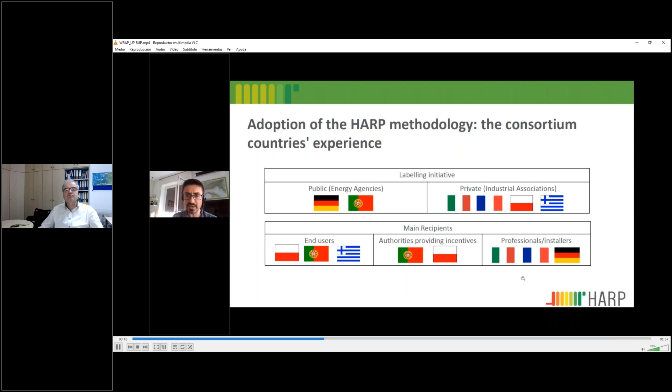BuildUp also offers the opportunity to host webinars on all the topics related to energy efficiency. More recently, BuildUp has opened the opportunity to distinguished experts in the field to share their knowledge in front of our cameras in the BuildUp Expert Talks.

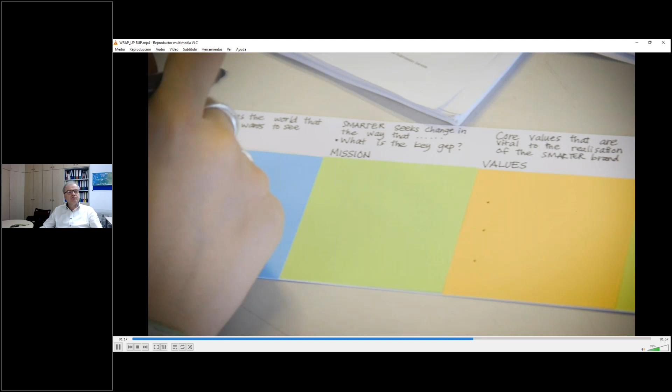BuildUp portal shares daily the most relevant events in the field of energy efficiency and renewable energy, but also participates actively in many European events around the year as EPB Center and REHVA Conference, Horizon 2020, Interreg, and Cost Actions events, Covenant of Mayors, and much more, with the aim of further disseminating the results and helping to create high-quality media content.

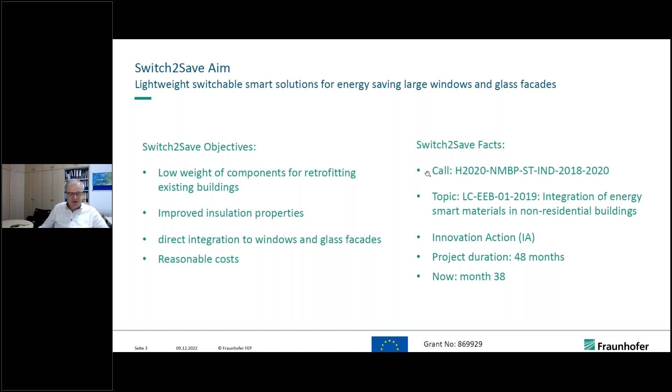At the end, we want to have components ready for retrofitting. So this is a short introduction about the consortium targeting exactly this. We are covering the entire value chain of such a research and development project, starting really from the basics, from the materials. Of course we don't start from zero here; all institutions have pre-existing know-how, and in the project it came about improving that, making it more reliable, more effective.

But that was really only the starting point of the project. The main core of the project was the development of components out of these materials, which are ready for building integration. And finally, where the project presently is, we want to go into buildings in order to demonstrate what we have achieved and measure the effect.

So this is a little bit more in detail on what exactly these steps meant. At the beginning we had to look into the materials which we had, about electrochromic and thermochromic materials, both special classes of switchable coatings which are already known in science for a lot of years. These materials should be improved and then put down onto components which are prone to be integrated into demonstrator buildings and components.

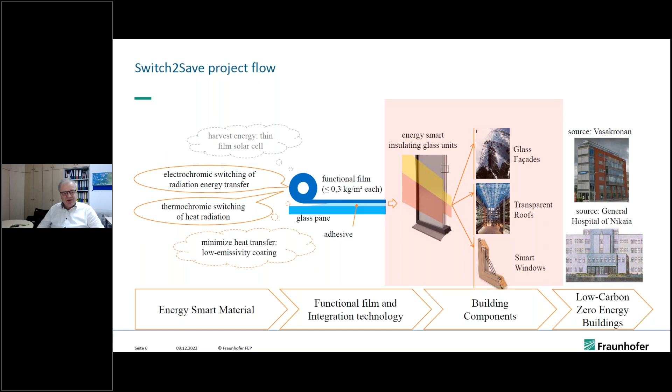Presently, we are closer to the end of the project, and we are indeed at the core part. The outcome of the project will not be to have just 2 or 3 buildings equipped with these smart or new materials, but really to have the components available to equip different new buildings and distribute this over Europe after the end of the project.

So I have already mentioned the two terms, electrochromic and thermochromic, which play a crucial role in our project. Now I want to shortly introduce you to the nature of these materials and what we can achieve with this.

If you look into window technology development, that has already a pretty long history. The first windows were installed by human beings around 4,000 years ago. But for a very long time, energy efficiency was not the main issue connected to the development of windows. So this changed

in the 1970s, in the course of the first oil crisis. Since then, saving energy in the building sector really became an issue. The first answer, well developed since then, was the development of low-E and solar control coatings in order to make windows more energy efficient than they had been before. This can today be regarded more or less as state of the art, even though technological developments in this area are still possible.

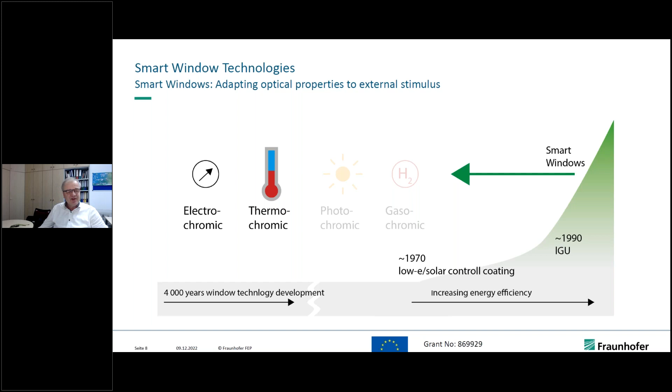So let's start with explaining what an electrochromic coating or electrochromic window can achieve. First of all, the stimulus which changes the optical properties is an electrical control signal, meaning that it's something an operator, an owner of a building, can control, or a human-installed control unit can give out this electrical signal. So that's something which can really be changed intentionally by the control software of the building.

This situation you have here on both sides, and what you can do with electrochromic coating is tune the properties of the windows, so you can control how much of each component is coming through the window. You see that you have a bright state and a dark state, and in the dark state you reduce the incoming visible light to a very low portion, but you also have a considerable effect on the near-infrared light. So what you achieve here is a shading for the light itself, but also a shading for the transmitted radiation. This is reduced to around only 1% of the original values coming from outside.

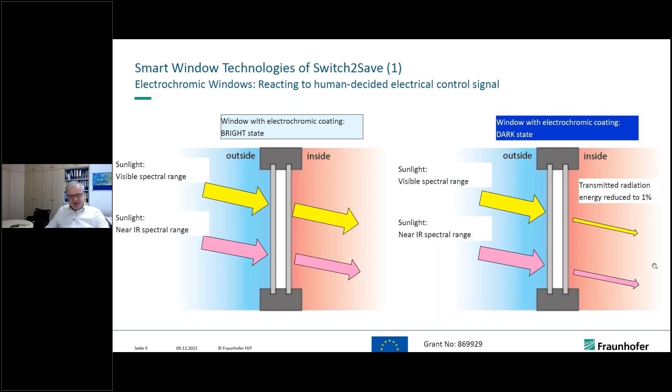One needs to say that here only the radiation transfer is considered. There's also a heat conduction component which is not considered in this presentation, but also plays a role if you want to make detailed considerations. But the picture is basically as I have shown here.

In case of the thermochromic windows, you don't have the possibility to control it yourself, but the window is controlled by the external stimulus of temperature, meaning that the window changes its properties by itself if the temperature of the window is changing.

Here you have the same situation. You have illumination from the outside consisting of the visible spectral range and the infrared spectral range. You have a bright and cold state in which you have a reduction of both components, and you have a warm state in which the visible light is more or less unchanged compared to the cold state,

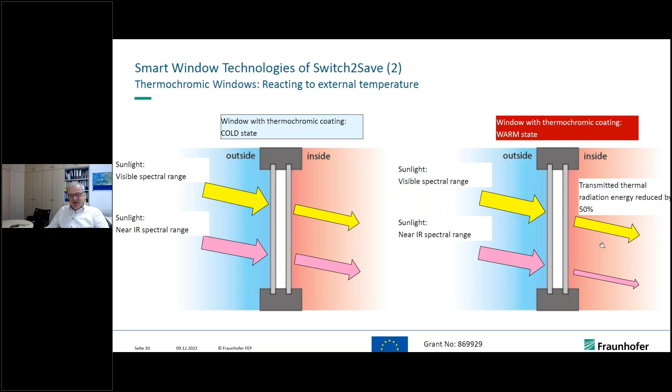but you have a reaction only in the near-infrared, meaning that the window is controlling the amount of heat in the near-infrared range by itself, but it's not changing the radiation in the visible spectral range. You don't see the change, but nevertheless the energy input itself is changed.

transmitting the heat, but it's not visible for human beings. As a state of the art, we can regard the static coatings, the low E and solar control coatings, which are already known since the 70s, as I had explained at the beginning.

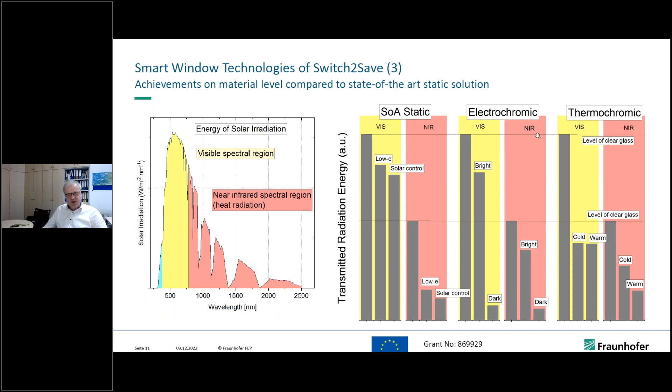And now, how do we demonstrate this in Switch2Save? We have different steps, and already at the very beginning of the project, in parallel to the material development, we started with the demonstration, and in this case, of course, it was based on modeling

different buildings and seeing how much can be theoretically achieved if we install the materials developed in parallel by the partners. We distinguished two situations from the geographical point of view. We made estimations in Athens, and we made the same estimations in Stockholm, which of course have completely different climatic situations and also different requirements concerning heating and cooling.

And I need to say that these model buildings, which had been assumed here, were buildings with a very high percentage of window installation, which can be typical for non-residential buildings, the topic of Switch2Save, but of course not all of them are like that.

And in particular, the demonstration sites, which we will introduce later, do not have such a high window percentage as the ones assumed here. So that's really an extreme case, and shows the maximum which can be achieved with these kinds of windows.

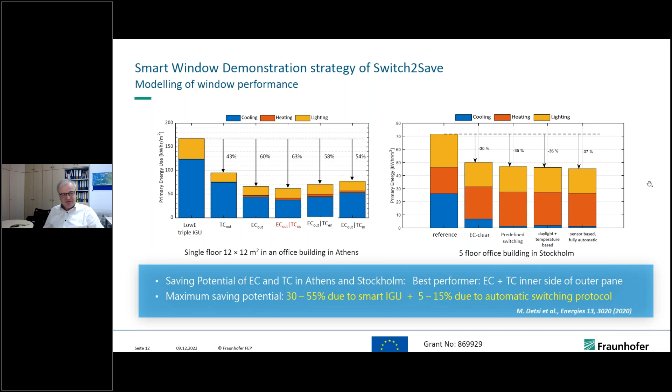The way how you can achieve this is really different in both cases, because in Athens you are saving for cooling, and in Stockholm, of course, for heating. Due to the special properties, especially of the electrochromic film, you also need to consider the savings achieved in inside illumination, because the electrochromic coatings are capable of adjusting the incoming light so that you need only a minimum. So this all together, and the high window percentage, leads to these maximum values according to the modelling of the building. So, of course, this is theory.

We are now going to practice. And in practice, it's of course the question of how you measure that you have achieved something.

There was a work package in our project which made a very interesting approach. It not only measured the temperature inside, but the main property was the so-called predicted mean vote, which measures the well-being of humans inside such a room. This is influenced by various factors. A very important one is the so-called thermal comfort, which is not only the temperature, but also air velocity, the floor temperature and the wall temperature, also the humidity, and still some other parameters. Then the indoor air quality is also measured.

And of course, the energy consumption measurement is a crucial quantity which finally will decide whether we had been successful or not. These measurements are made in rooms not only with a single sensor, but you have a real distribution of different sensors in order to have a very comprehensive view on all these properties, in order to have a reasonable outcome at the end of the project.

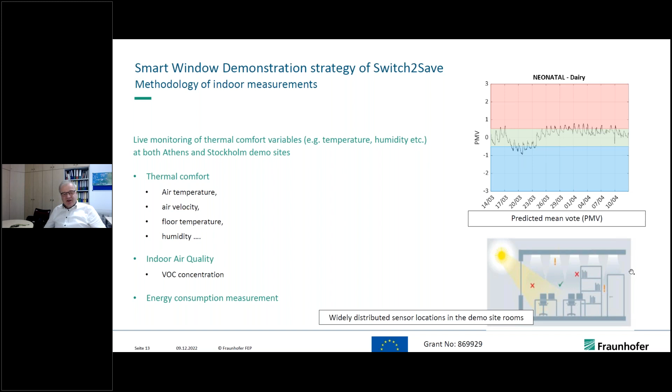So the approach, how to come to the results - there had been two different approaches inside the project. The most important one, for the big demo sites, is to divide the demonstration part into 3 phases. In the middle is the installation of the Switch2Save components. As I have already said, that's where we are presently.

Before that, the work package already started with the pre-monitoring of the interior of the demo sites, meaning that over more than a year, installations of different sensors had been made to really monitor all the parameters in an initial state. Now we have the installations, and right after them, post-monitoring of the interior of the demo sites will start, and then the post and the pre time will be compared, and the effect will be measured.

So as you might see, this is a quite challenging schedule. Challenging, due to the fact that, due to external circumstances which you probably all can imagine, the installation is later than we had initially anticipated, and we mitigated this with 2 approaches. One is that the post-monitoring will stretch beyond the end of the project.

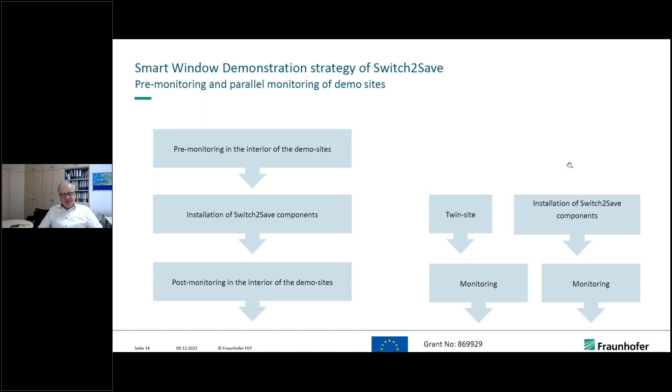So if possible, where possible, we take this approach also, so we have 2 approaches in parallel. With this, we hope that until the end of the project, which will be in September, we will have already reasonable pre-results, and then the completed results we will get only after a certain time after the end of the project.

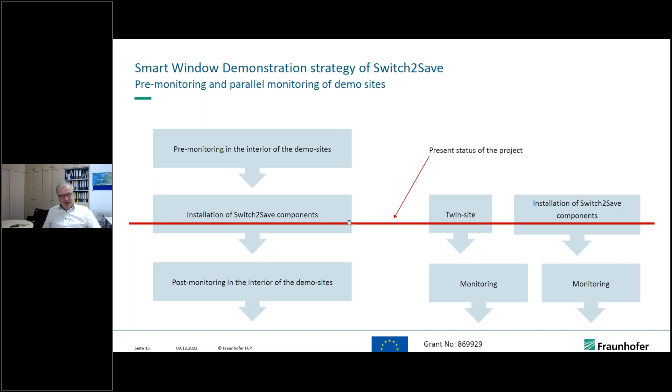So, yeah, here it's where we are. Installation of the components is taking place, and here is where it's taking place. We have two big demo sites, one in Sweden, one in Greece - two completely different areas in Europe. Both of them are non-residential buildings. The Kronan building is an office building, and in Athens we have a hospital.

Additionally to this, we have still installed in Dresden small mock-ups for measuring the effect of thermochromic roof elements. Here we will exploit the parallel approach, otherwise it would be impossible to get the result by the end of the project.

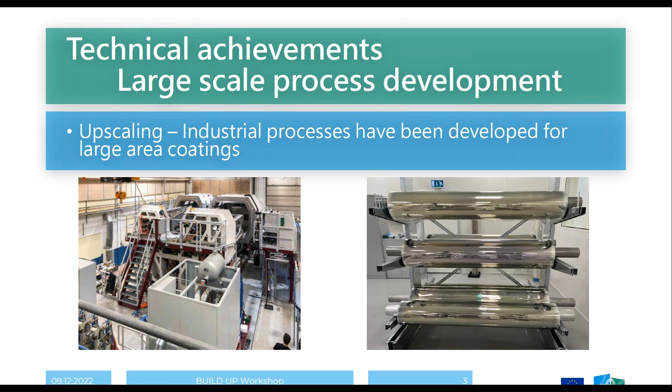I'll continue to the next technical achievement that has been vital in this project. Matthias gave you a lot of information about electrochromics and the importance of having a high light transmittance in the clear state. One of the objectives in this project was to reach a visual light transmittance above 70%, and that we have managed to do. Actually, we are now at 75%, which gives a very good light transmittance and a good indoor light situation in the building. It is, of course, very important.

Also, as I mentioned, we have scaled up the coatings so we can build very large insulated glass units. Another objective in this project has been to improve the insulation, and there we have achieved a very low U value for these IGUs, 0.4, which gives a very good value. We have also reduced the weight compared to a state-of-the-art insulated glass unit by 30%, and that is for a triple glass IGU.

As you can see on the picture here, this is an insulated glass unit. The width is 1.5 meters and the length is about 4.2 meters. This is very close to the largest we can produce now, because there is a limitation in the autoclave, in the glass lamination. So we cannot really fit glass that is longer than maybe 4.3 meters or so.

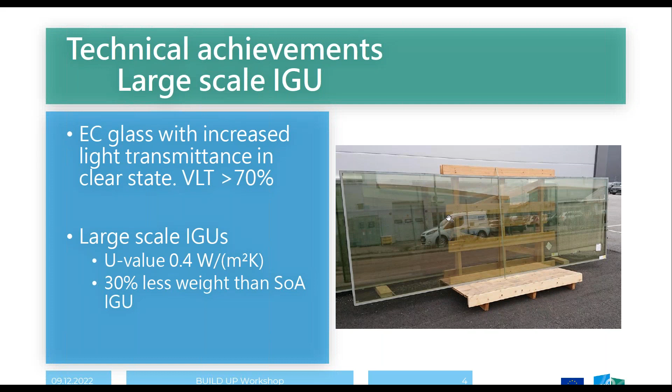Another very important achievement and deliverable in this project was to develop a wireless control system. The demo buildings are already existing buildings, and we don't want to interfere too much with the building. So when you install the control system, we want to get rid of as many wires as possible, wires for power supply and also for communication.

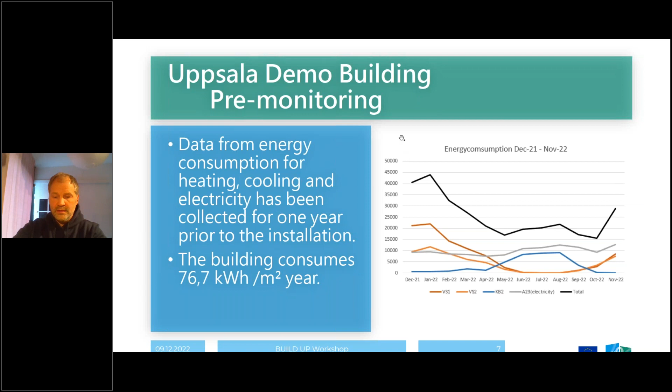So when it comes to the interesting things here, I would say the gases we don't expect to see much change in, but the indoor temperature, the illuminance, and perhaps also presence can change after the installation, especially if you have spaces close to windows where you have a lot of sun. People tend to avoid those areas during the summer months. It will be very interesting to see if there is a difference now.

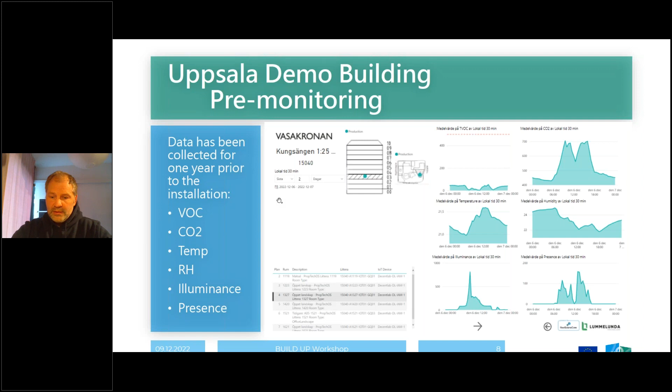We'll continue again. Okay, here. This data has been collected by Vasakronan, the largest real estate owner in Sweden, and they have very good software for both collecting and presenting data. So it's very easy to compare data from, let's say, different sensors that may be located in different rooms and floors, and also from different time periods.

So what we're looking at here is temperature variations over 48 hours. And down here we have the illuminance levels, also during 48 hours. This can be presented in many different ways. So that's really good.

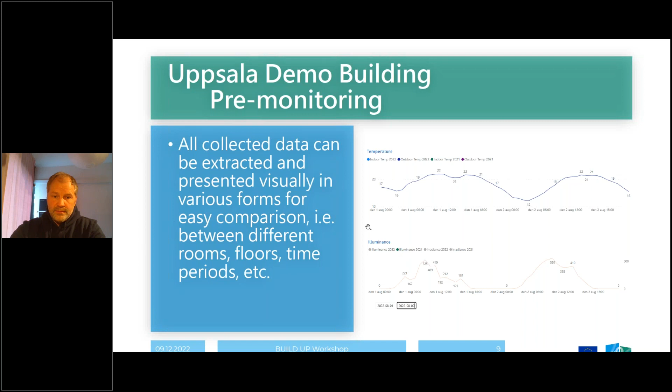Let's see, if I go to the next slide. Now I'm going to talk a little bit about the actual installation that has been done by Facade Glass. Before the lamination and installation, they had to modify the profiles. As you can see, the existing insulated glass units were just 2-pane IGUs, and now it's a triple-pane IGU, so they had to increase this distance a little bit. But apart from that, everything went smoothly.

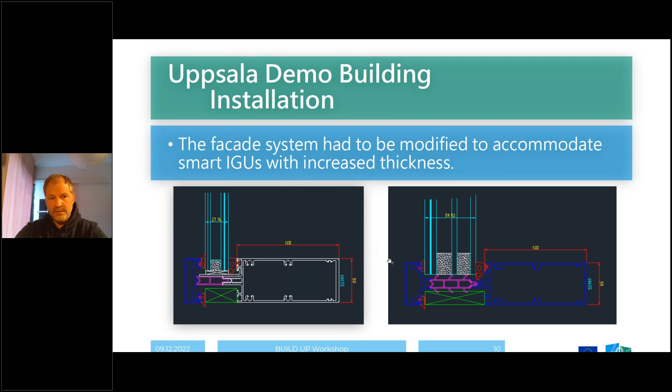I'm going to show you some pictures of the actual installation, if I can only change the slide. So today, actually last week, we installed all the glass panes, the insulated glass units. This is a 6-story building. As you can see here, the glass is delivered on racks like this and lifted into place by a crane, and the people doing it from the outside move it with this forklift here.

And as you can see, we have replaced 3 floors when this picture was taken. So the more bluish tone is the original windows.

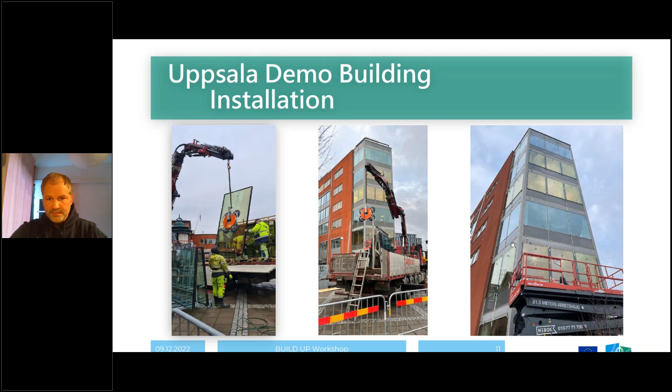And what's going on now, right now, is that we are doing the installation this week of the control system. It will be very easy to do now that it's wireless, and the follow-up monitoring or post-installation monitoring is about to be started, and it will be done in the same way as it was before in the pre-monitoring. We will have an extra focus on the energy consumption, the indoor temperatures, of course, also luminance and presence.

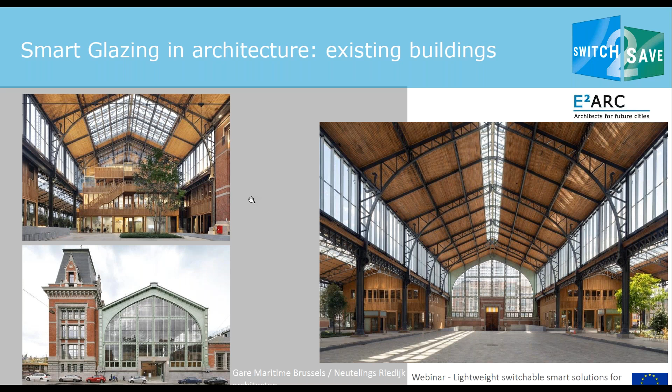With its many forms, types, and applications, glass can enhance the architectural value of a building. Large glass facades and roofs are now a major design element. Compared to opaque materials, glass is associated with increased heat gains and losses. Therefore, glazing selection plays a key role in determining a building's overall thermal performance. When using glass as such a dominant facade feature, the choice of the glass is key. In modern buildings, up to more than 60% of energy transfer through the building envelope is related to glazing components.

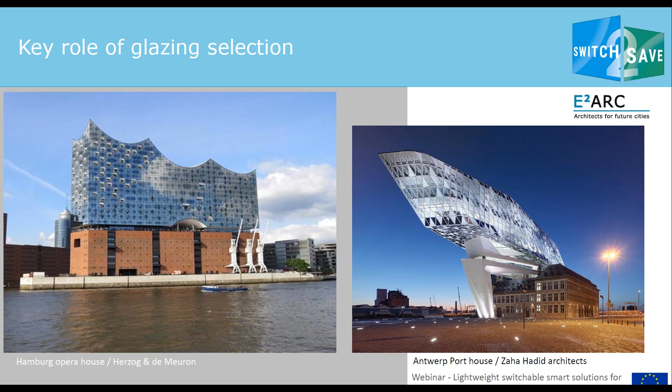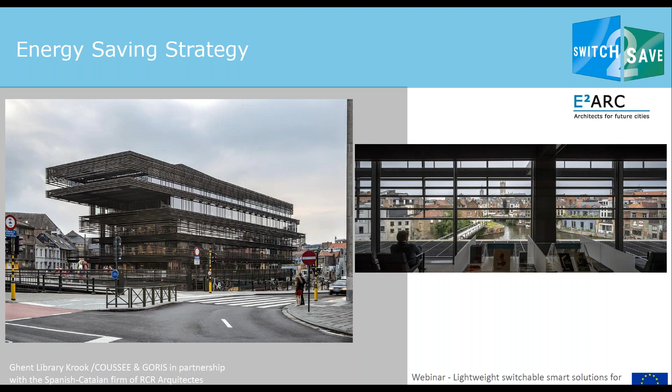The strategy: with careful consideration of the orientation and the use of exterior shading, as you can see here in this building in Ghent, the integration of large transparent facade and roof elements can become an integral part of an energy saving strategy. Here you see that the window blinds are used to control the solar radiation, but as you can see on the photo on the right, these window blinds compromise interior daylight conditions and block the view somehow to the exterior. Here the architects have made the choice that the window blinds make the architecture.

Another answer to these challenges can be what we present here, a high performance glazing. This glazing can contribute to the insulation of a building and deliver energy savings while ensuring comfort conditions for users and without losing sight and architectural freedom.

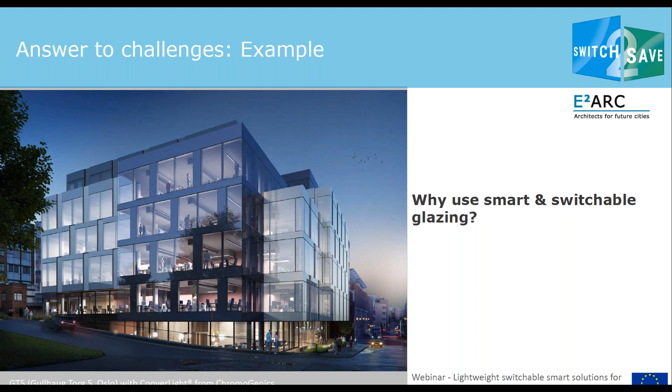Why would we use smart and switchable glazing? First, glass has no limitations, which gives more architectural freedom. Second, the electrochromic technology in the dynamic solar control glass stops the solar heat even before it enters the building. Third, it can act as an automatic climate system where unwanted solar heat radiation decreases, which keeps the premises cool, and the use of external solar control can be avoided. As a result, smart and switchable glazing can be very cost effective for our buildings.

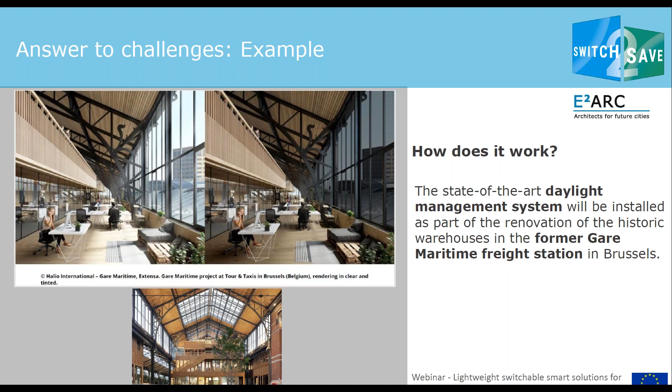How does it work? How switchable smart glazing works, we see here also in the same building in Brussels, the Gare Maritime, how the properties of the glass parts change. Here it renders from clear to tinted in only 3 minutes. In only these 3 minutes, the complete transition takes place from transparent to a non-transparent surface, letting only 3% of the light through. 3 benefits of the automated dimmable electrochromic solar control glazing were of crucial importance here for the real estate developer Extensa: first, its ease of use; second, the avoidance of disruptive solar control elements on the historic facade, as well as its integration within the circular economy concept.

In SWITCH2SAVE, within this project, we are developing this new and switchable window suitable for direct integration into windows and glass facades.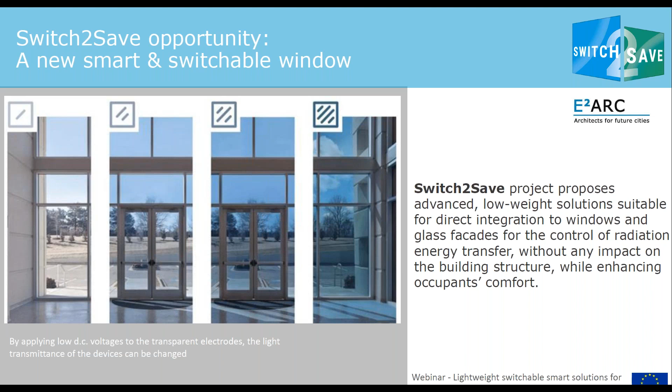Here you can see how smart the glass is and how it renders from very clear to very tinted. In this case, more and more tinted blue.

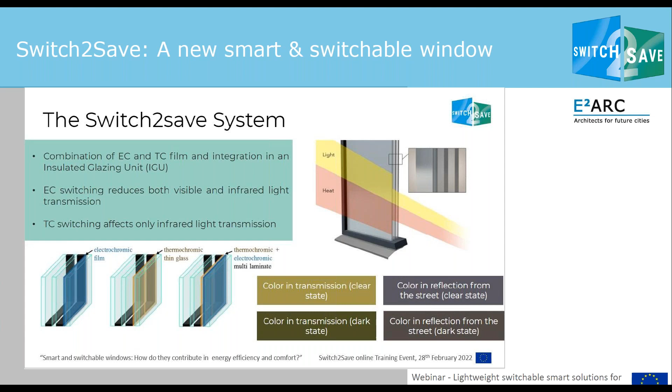On the window detail here, you see the triple insulated glass unit with electrochromic and thermochromic film laminated on the glass. The specification sheet will be soon available on the website.

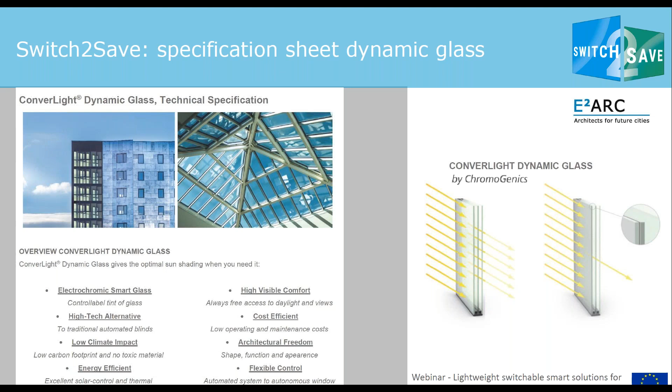Now to the competition. We would like to promote what we are doing in the Switch to Save project by organizing this competition. It aims to collect design concepts of non-residential buildings. These can be new or renovation projects featuring glass facades, roofs, or large window-to-wall areas.

We ask for a design concept. It should be non-residential, no other restriction regarding the size, location, or use of the proposed building concept. The project can be set within any hypothetical site or any size, anywhere in Europe, in the city, on the countrysides, in any climate.

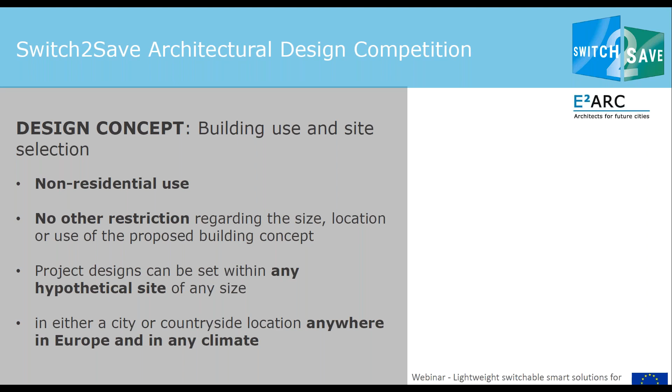Who is eligible for this competition? The competition is open to students, young architects up to 10 years after graduation, alone or in a multidisciplinary team, up to 3 members per team, open to all nationalities. The team members should be based in the European Union or associated countries.

The evaluation criteria: the design concept and the level of innovation. First, we ask to elaborate on the design concept, the drivers, the possible barriers, other parameters like aesthetic integration, leading to the proposed design as a response to the competition brief. We also ask to describe the innovative aspects in the project regarding the integration of the smart glazing.

The energy saving concept, second criterion: describe how your project addresses the need for energy efficiency in view of the EU energy targets, how the design maximizes the energy saving potential.

Third, the exploitation of the Switch to Save smart functionalities and the replicability. Describe how these smart functionalities have been integrated in your project across different design principles. Explain also how your approach in integrating the IGUs in your projects can be replicated in other contexts or has the potential to be upscaled.

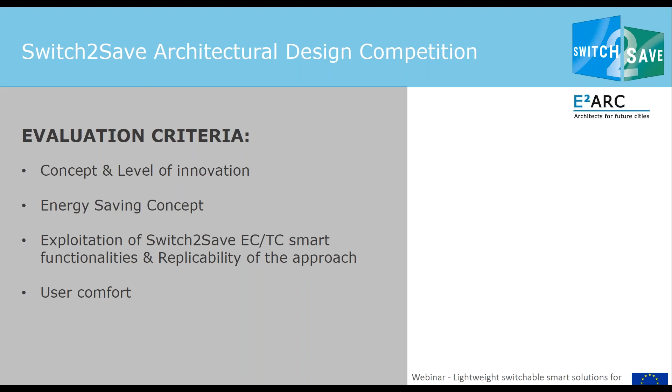The jury is a mix of people from academia and people from practice or industry. You can find the CVs on the website. The 6 person, in a nutshell, I will describe them.

Matthias Veland from Fraunhofer is a physicist and coordinator of the Switch to Save project. Maria Founti is an engineer and professor in the School of Mechanical Engineering of the National Technical University of Athens. Sarah Marompa, me, I'm a Belgian architect with both experience in architectural practice and research.

Alexander Kraft has a background in electrochemistry and is an expert in electrochromic systems for Chromogenics in Sweden. Hans Svart is an engineer, quality manager for facade glass in Sweden too. And finally, John Valtijk, he's a physicist and the CEO of Cat Market Limited Company. He is the former coordinator of the project and he's now member of the external advisory board.

The prizes you can win: first prize €1,000, second prize 500. The winners will also receive a demo kit of a fully functional energy smart window, switch to save window. They have the possibility to present the winning projects during the prize ceremony. The travel expenses will be covered and this will take place in Athens in the month of September 23.

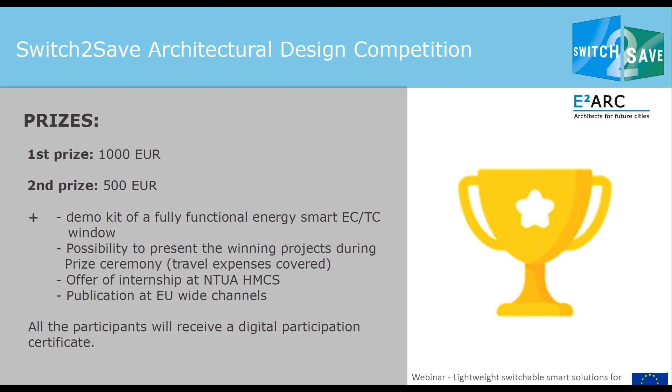Also, a very interesting internship will be offered at the National Technical University of Athens for 6 months. And of course, there will be publication at EU-wide channels. What do we ask to submit?

One PDF file, maximum 30 megabytes, with the brief description. You have the template, you can see it on the right of the competition brief. We are asking for one infographic presenting the proposed design in response to the competition brief and maybe other visual material. And then we ask to sign the declaration of authorship.

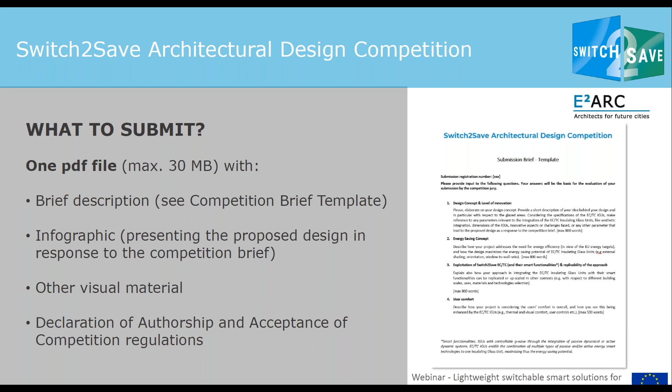How to submit? You have to register through a link. You find it on the website. After that, you get the confirmation of registration by email. The team leader gets it, so the team can be maximum 3 persons, with all the information on how to upload the proposal, the design proposal.

You submit then your proposal to the own cloud. Then you will get the confirmation and the final results finally will also be communicated by email.

The schedule: we have launched this competition in October 22. The registration deadline is end of January 23. We are open to questions till the end of February. We ask you to submit before the end of March and the winners will be announced the 16th of May.

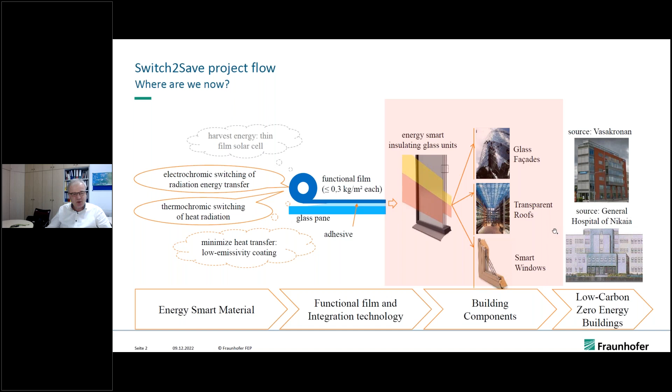So let's have a look at what was written in the proposal, what the project is about, and what the aims are in terms of impact. Of course, we have various parameters here. The most important one is the energy saving potential of these components. But apart from this, there are also various other things which have been part of the impact or had been important for it.

The cost should be reasonable, and also preventing glare, fading, and overheating. Eliminate the need for shades and blinds. Sarah has explained how important this can be for a historical building. Gregor made a remark about the presence of people inside such a room equipped with smart coating. Those are some social aspects for this as well.

But the most important one is this energy saving, of course. So if you look into the impacts described in the proposal, we can say most of them are either met, or we have a good chance to prove them in the remaining project time. So we are quite positive about what we have achieved so far in the project, and that we can bring this to a successful end.

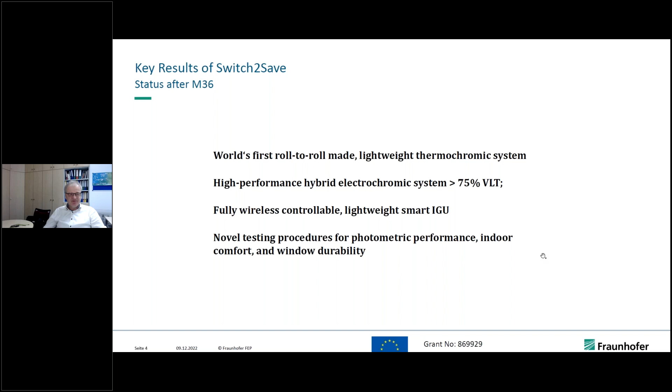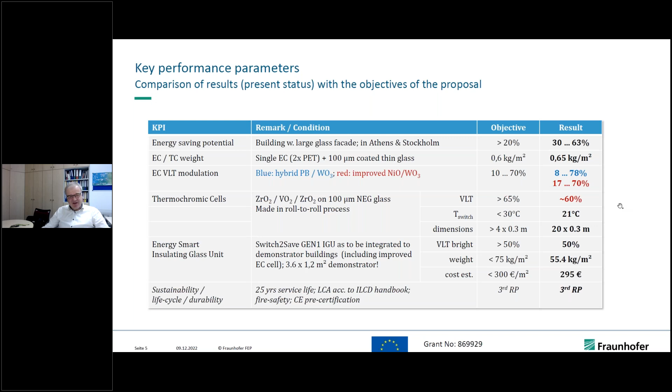So all in all, one can say that the key performance parameters are also fulfilled. From the project and reporting point of view, I think we will be quite fine with this project. Nevertheless, I want to revisit some concerns which are generally connected to the application of smart windows. This is not something completely new. Smart coatings, the basics have already been developed for quite a couple of years, and there are always sometimes discussions going on about the real use, the applicability, and the potential for widespread use of these kind of components.

I want to discuss these concerns and somehow comment on how the Switch2Save response to these concerns is. The first one is: electrochromic windows are too expensive. That's something which is quite often used, and anybody who has ever asked for a quote for an electrochromic window will see that this is of course more expensive than state-of-the-art low-E or solar control coatings. That's true, and even though the cost aspect was somehow covered in the project as well, that's of course something which we cannot run away from completely.

So the question, or the answer to this from the Switch2Save point of view, is: okay, the cost is higher compared to a static window. However, you have a certain advantage from that, and over a certain time you will have an energy payback, which will, on the longer run or mid-term run, lead to a saving potential in energy, and this is of course helping the general estimation of costs. As I've already mentioned, and Gregor has mentioned, we have overperformed especially in the electrochromic windows.

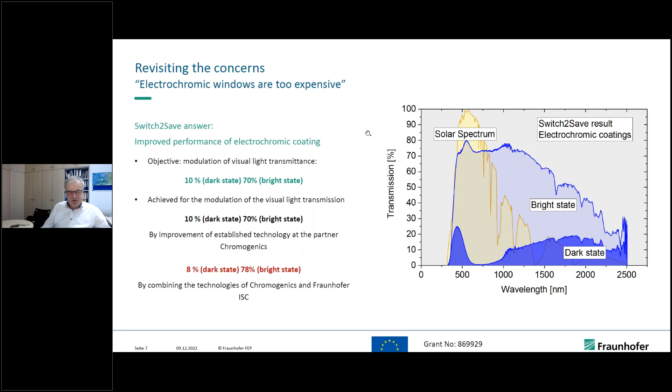You see again the spectra of the two modes, the dark state and the bright state. So everything in between can be adapted. This is a real tool to save energy. How much can be saved? That's of course depending on the building and on the geographical location. Inside Switch2Save, we have also developed tools to model this and make reasonable predictions. With these two components, I think we can really give a cost analysis and somehow mitigate the concern that electrochromic windows are expensive.

I want to move on. Okay, next one: installation of electrochromic windows is too expensive. Here it's not about the window itself, but about the installation. It's related to the fact that you have to do a lot of wiring in order to connect each window to an electrical control unit. Everybody who has already done installations in windows knows that this can be cost intensive in the building phase.

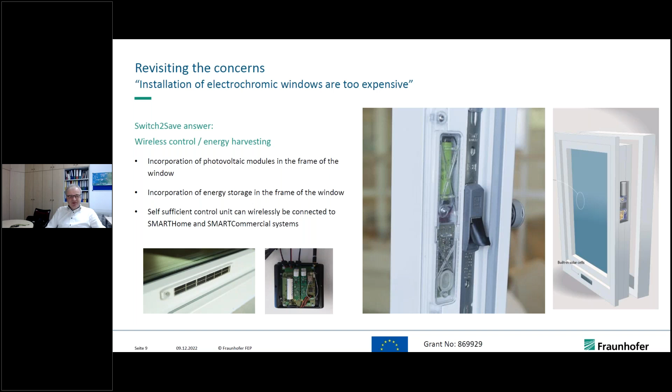So I think these two major concerns for electrochromic windows we have at least addressed, and addressed in a very good way. We have provided good solutions. Whether they are convincing or not, that's of course at the end of the day depending on the specific installations and on what people expect.

How about thermochromic windows? Thermochromic windows have a low light transmittance. Of course, that's true. That's something which we already mentioned when I introduced the principle at the beginning. The light transmission is lower than low-E solar control, and Gregor has also outlined that this is something which plays an important role for his electrochromic windows, to have the potential to be as high as possible.

There's still another optical disadvantage of the thermochromic windows, that's the unbeneficial color. If you look into the color which comes out of these transmission spectra, you will see that it's yellow, which is not something architects like, and most people don't like either.

So how do we tackle this one? We cannot change the world here, of course. The material side has made some improvements, but finally we cannot run out of the general principles.

But we have thought about the application scenario. And here we found out that for thermochromic windows, it's probably more efficient to put them into roofs instead of the windows, because both the light transmittance and the appearance of color are less important in these cases. At least it has the potential to do this.

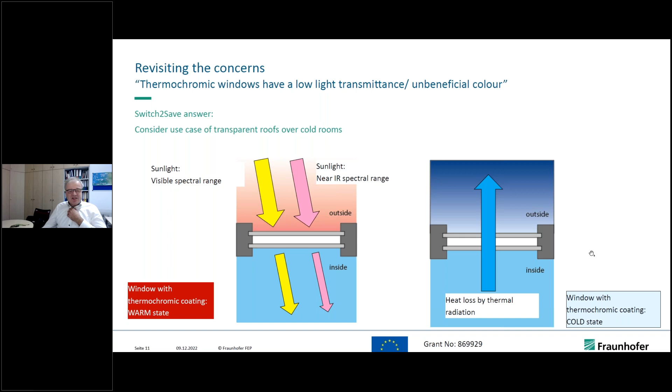In the warm state, you block the light which is coming from the top. And in the cold state, you have a possibility of thermal radiation to the upper atmosphere. Both of these scenarios help a cooling system keep the inside at a reasonable cool temperature compared to the outside.

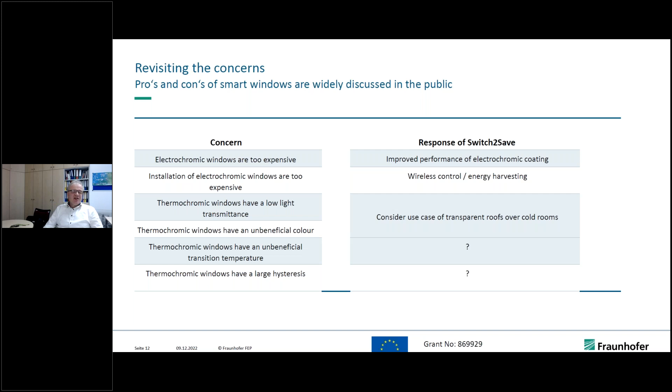So these two concerns are addressed by a slightly changed application scenario than we had anticipated at the beginning. The transparent roofs become a little bit more important for thermochromics compared to the windows.

There are two things still remaining. Thermochromic windows have an unbeneficial transition temperature—the temperature when switching between the two states—and they also have a large hysteresis.

Sarah has shown that electrochromic windows can be quite fast, within 3 minutes. Here you have this transition temperature, which is inherently only a very slow transition from one state to the other, because the outside temperature is also not changing within 3 minutes, at least in most cases.

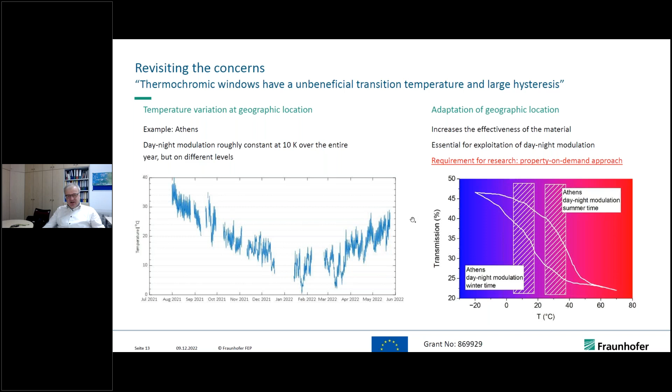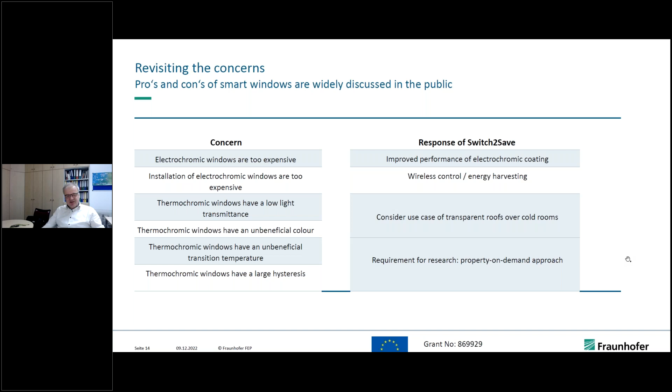So these are, again, all the responses of Switch2Save to the concerns which are, of course, not told to us—not even told to us by our reviewers—but which are frequently discussed at any events or conferences where these kinds of coatings and their usage are discussed.

And now some comments about the TRL levels which we have achieved in the project and where we are. Electrochromic coatings have already a TRL9 level in their standard setup.

So you have seen some buildings where everything is already realized. However, we have made, as I mentioned, some material improvements, and these are now in the demo site, so they are clearly not TRL9.

We have judged this as TRL7 presently, and we want to achieve this monitoring in the next years, because the installations, of course, will remain where they are.

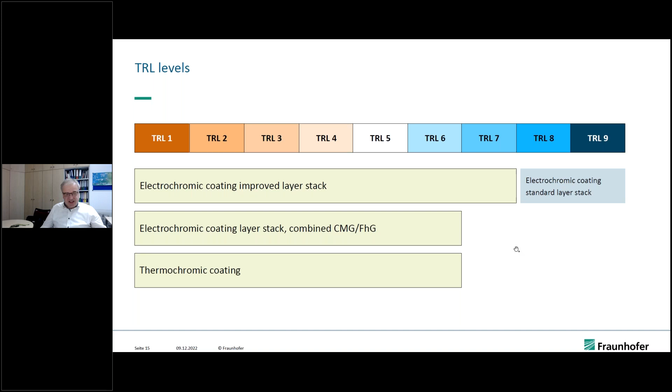We will achieve by this also the higher TRL levels, but the new things obviously not TRL9 yet. The same is concerning the best properties we have achieved, which is a combining of different technologies. Here we are still at TRL7, because it's not going into the real big buildings so far. The same is for the thermochromic coatings, where we have smaller mock-ups where we test the technology. So that's what will be the TRL level at the end of the project, which is, I think, not bad, but still needs some development before it can really have a large impact on Europe, on the European building sector. That can still take some time also after the end of the project.

So then another question is, what is more important, cooling or heating? You have seen in the presentation some pre-monitoring times where both can play a role. The question is, what is more important? It's primarily dependent on the geographic location. So if we distinguish predominantly cold climate, some intermediate states, and predominantly warm climate, then there are different impacts of cooling and heating on the total energy consumption. Two of these geographic locations are covered by Switch2Save. One is cold climate, which is what I see in Stockholm, and moderate climate with a majority of warm days, that's South Europe. Both of them are topics in Switch2Save. The other one is in the middle, of course, and real southern areas like deserts are not covered here.

But if I look into the importance of the electrochromic and thermochromic coatings, I see that the warmer it is, the more important it can be. That's definitely true for the thermochromic coatings, and for the electrochromic coatings that's still a little bit under investigation. But you have seen that the main effect of the electrochromic coating is shading without the use of curtains. And the shading, of course, is more necessary in areas with very strong sunshine compared to those with only moderate light. So that's why I would expect that for the electrochromic coatings too, you can have a higher impact on energy saving if it's coming about from cooling.

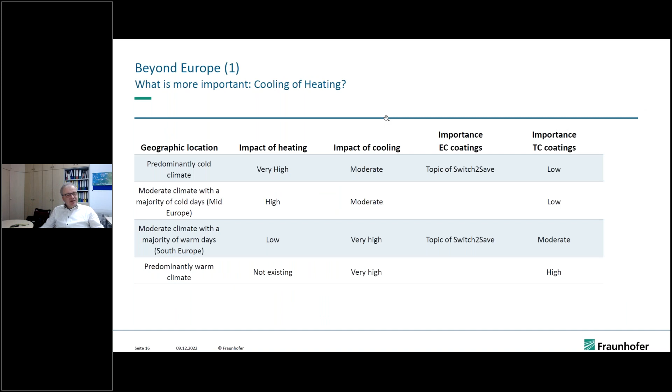And what's the situation here in Europe and beyond Europe today? Today we have in residential buildings, which had not been part of the Switch2Save project but are nevertheless important for the building sector, only a negligible part going to cooling in Europe. Most of the energy is going to heating in Europe. In non-residential buildings it's a little different, but still it's a kind of balance. You also have some cooling, but it's not crucial in the European Union.

If you look into the future, there's a graph here also on the right-hand side, a prediction for the selling of air conditioning systems worldwide. If you look how this is in Europe, there's a projection that this is increasing, so cooling will become more important in Europe. But if you look into other areas, especially China or India, and you could add still other countries like Indonesia, you see that worldwide for cooling there's a very large increase expected in the next decades. In Europe and in the United States and Korea, that is of course driven by global warming, but in the other countries you still have an increase of welfare combined with global warming. So this is why it's so important globally to have efficient cooling situations.

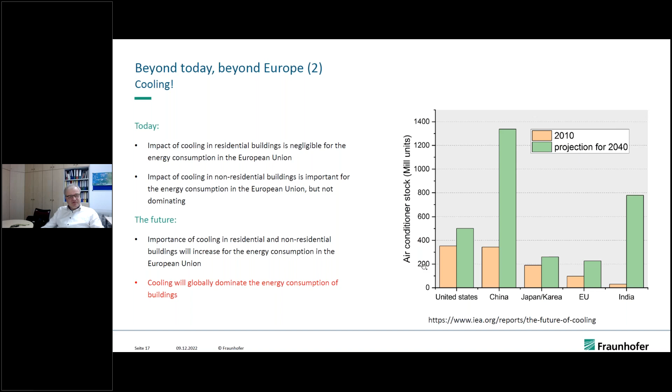So with this, I almost want to conclude, but for the impact it is also very important that we network with other projects which are run in parallel, also on building envelope, not primarily on windows but on the envelope as a whole. It is of course very good if we can cooperate with them for future developments to combine the solutions. There had been a meeting at the Sustainable Places conference this year, and there the networking started and it's continuing.

And we think that by the end of the project we can present a combined solution which can be taken up by other projects or by practice already, depending on how far we can go with this.

In summary, I would say Switch2Save has fulfilled or will fulfill its goals by the end of the project. We will have the window components, and we will have demo sites which can demonstrate them. What is needed is more funding, also by the European Commission, for bringing up the TRL levels of the most efficient solutions.

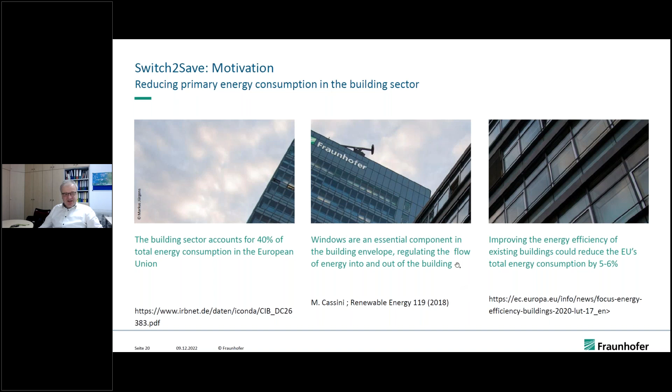And here I want to conclude with this motivation slide which I started with at the beginning also. Here again are the three statements, and I think finally that Switch2Save can contribute something into bringing better solutions into action for tackling these issues which are written here. With this, I want to conclude.